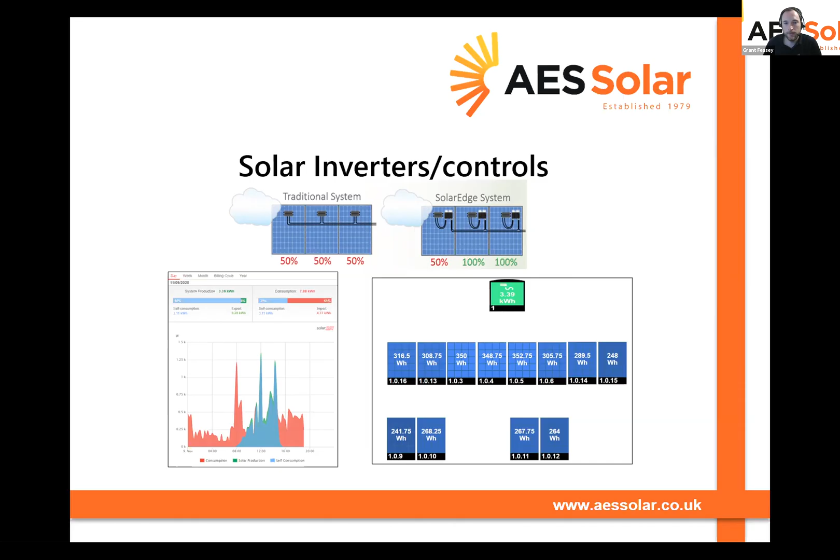So instead of just knowing what the panels are generating, you can see what's being used, what's being exported. There's also sophisticated monitoring, which I'll show on the next slide, which ties in with other devices. As houses get smarter in general, people are getting more aware, they want to see what's going on. So the inverters still do the basic job, they convert the DC from the panels to AC to go to the grid, but they're just doing this in a more intelligent way. They're allowing people to interact with their systems and for the systems in the house to interact with each other in a way that consumers can understand.

So the other products that go alongside solar PV: there's a growing trend for people not just to want to generate their own energy, but to have more and more of these devices that allow them to use it smartly and to be self-sufficient. And you get two types of customers. You get customers who want it to be sustainable and cost effective. You also get customers who see energy products now as a section of gadgets. So people would look at spending money on televisions or nice furniture or cars.

Now they're looking at things like home batteries, where they can see how much energy they're using themselves. They can use that power in a power cut. You can divert energy to your hot water tanks to maximize how much energy you use on site. Electric vehicles are becoming more common, and also things like smart hot water tanks. A company called Mixergy have a nice product that can tie into smart grid trading that could benefit from smart tariffs, where you can automatically use energy in the tank. You can import during low tariff times, and systems can manage all this automatically.

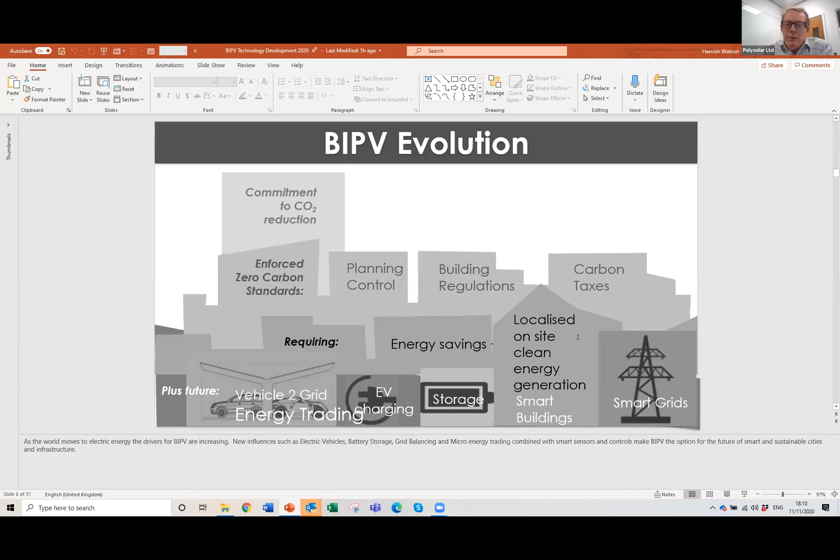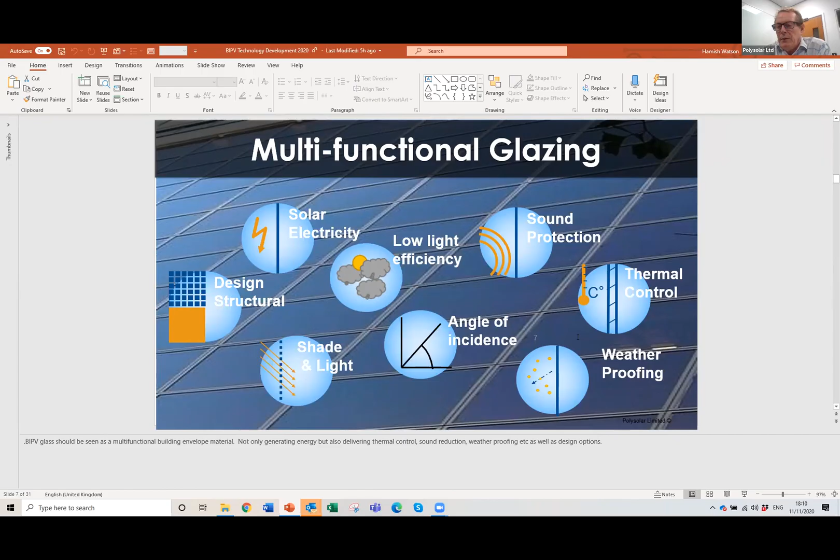Photovoltaic glazing is more than just a piece of glass, and it's more than a solar panel. It actually performs multiple functions and should be used as a multifunctional glazing material. So it's basically a high-end glazing, where it not only has the ability to produce power, but it also can reduce thermal losses, and can be used as an architectural feature. However, everything always comes down to price and return on investment. This is true within building integrated photovoltaics as it is in conventional photovoltaics.

This is an example as a sort of guidance. It certainly doesn't address any particular figures here. But if you're looking at a replacement for a curtain walling system in an office building, the construction costs with BIPV are the same. Your curtain walling framework, which is the aluminium mounting frame for glazing, is basically the same. We make small adaptations to existing systems, and we have our own as well. And then you've got the glass cost.

Now, the glass cost here is the glass for the outer glass, which is the photovoltaic glass, vis-a-vis a conventional piece of glass. But when it's built into a double glazed unit, its proportionate cost becomes fairly small as an additional cost for that PV element. Broadly speaking, to give you a rough idea, a PV glass vis-a-vis a conventional glass is probably about twice as much for the actual glass, but once it's into a high-end unit, it becomes actually quite a small proportion.

On top of that, you've got the electrical element, that's the wiring and the inverters and those sorts of things. They, as a proportion, are relatively small in BIPV, and their costs have dropped quite dramatically as well, alongside the cost of PV itself. In addition, you may do away with things like shading systems, brise-soleils, and those sorts of things on the outside of the building, i.e. mechanical constructions. And therefore the cost may be offset there.

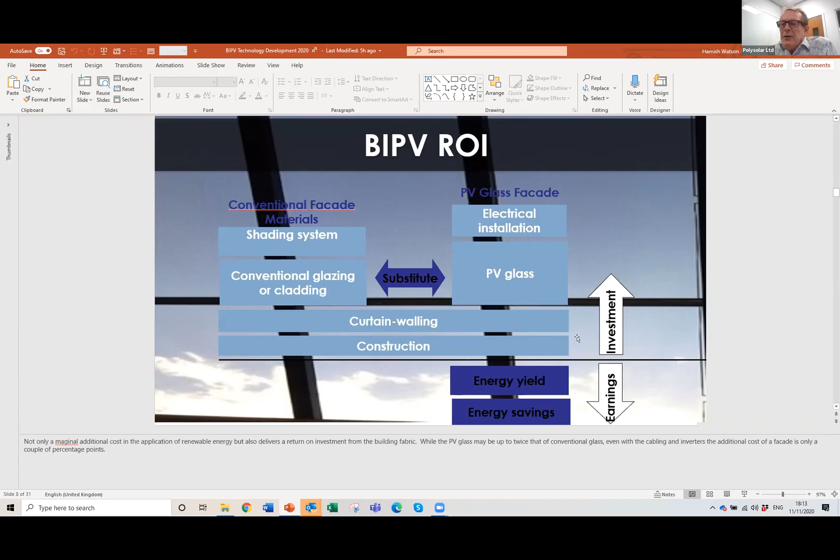And given that architecture is all about trying to put as much glass on an office building as possible, in order to allow it to be a deeper building and let light to the center of the building. The disadvantage of putting glass in a building is your heat losses or heat gains are significant, and therefore all those benefits are being lost in the energy that you've had to use. So there's always that trade-off in construction.

So just to give you a rough idea in terms of the technologies here. One of the advantages of thin film and the transparent glass that we use is it works at high temperatures, with less reduction in efficiency at high temperatures. Its efficiency is also consistent across the light spectrum, the light intensity, and so you don't get that drop off with low light levels.

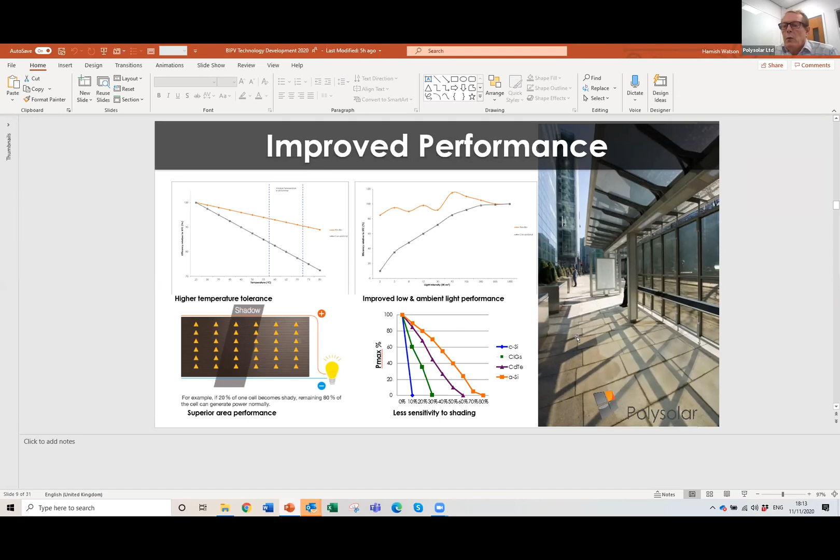Equally, it's less sensitive to shading, and we tend to link in parallel. So you're doing away with the need for microinverters and the like on a system. As I said, the other side of it is the thermal performance side of it.

So you're getting G values, and G value is primarily the heat gain into a building. And that is basically about half what you get out of high-end glazing currently using photovoltaic glazing. The U value is the insulation value, and that in most cases is about the equivalent of a triple glazed unit vis-a-vis a double glazed unit.

So those thermal values can actually produce much more of a benefit or a return to the customer than the power that they're generating in the first place. But it's an interesting factor. The reason behind that is threefold.

One is that the actual cells of the glass are made up of the same materials that you use to reflect heat anyway in conventional glass, but that actually makes the cell of the glass. In addition to that, you've got the shading effect of the photovoltaic, and in addition to that, you've also got some of that infrared light being transferred into electricity rather than into heat.

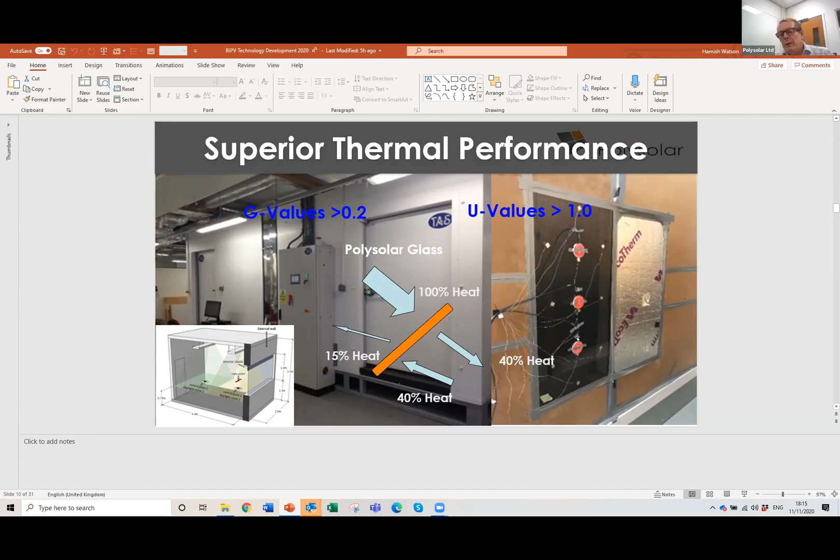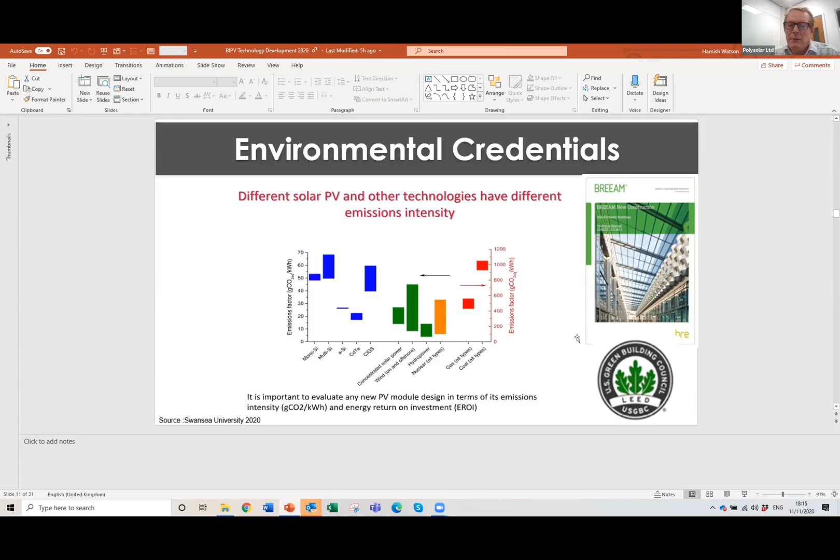In terms of what we produce as a company, we started out life with amorphous silicon. We made that transparent primarily just by putting a transparent conductive layer on the other side of the glass. It's a technology which was developed originally by BP about 20 odd years ago. Low efficiency relative to today's technology, and has largely dropped out of the market. It was much more important a decade ago when crystalline silicon was very expensive.

More recently we developed products in the cadmium telluride sector. This is a slightly different technology in the sense that the active material we put on and then we take off with a laser in order to pattern it to let light through, and therefore we can vary that transparency depending on what you want.

Again, the efficiency is about twice what it is for amorphous silicon, but still about half of what it is for crystalline silicon, where we also produce crystalline silicon semi-transparent cells where you've got crystalline cells embedded in glass and the light is allowed through around that, but it isn't actually a see-through system.

Our next generation of technologies, and where we are one of the world leaders, is in organic photovoltaics, which is man-made materials performing the same function, but the great advantage from a transparency point of view is that we can make them naturally transparent, and we can also save a lot of money in terms of how it's produced, and it's much more effective for the glazing industry rather than just the solar industry. The efficiency levels are rising all the time.

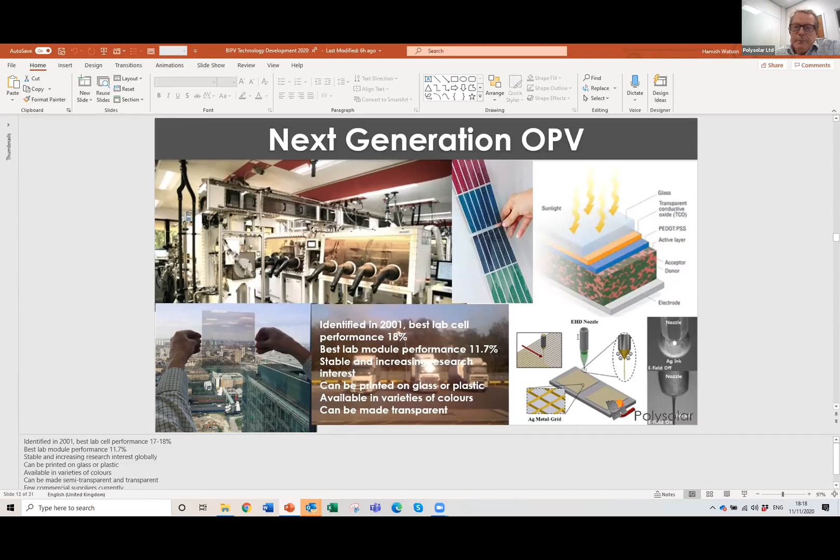Just to let you know a bit about other technologies, you've probably all heard about perovskites. Oxford PV is one of the pioneers in that field. That's a technology which has been very successful in terms of its efficiency improvements, and had a lot of global interest in terms of research and development.

It has a few problems still, in terms of its lifetime expectancy, but also the fact that it has a lot of lead in its manufacture. And so it still has constraining factors. More recently, Oxford PV started putting their perovskites on top of crystalline silicon to increase the overall efficiency of conventional solar panels.

In addition to that, there are some other technologies, and I won't go into all of them, but there's concentrators, luminescent films, diverting the light to concentrated PV cells on the side of windows to make them transparent, and a number of areas around that, none of which we directly operate in, but you should be aware of them.

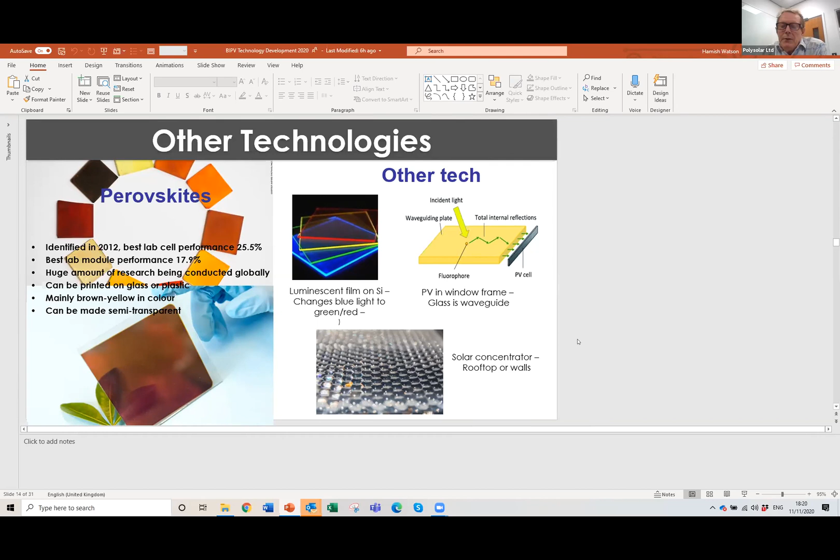In terms of the manufacturing side, the great advantage of organics is that it's a liquid print process. So we can print the active materials directly onto the glass, and we can do that with spray coaters and actually just spray those materials on in order to build up your cell. That has advantages from the glazing point of view, because it means we can make modules of different sizes, shapes, really anything that you can do with glass today, we can do with PV glass.

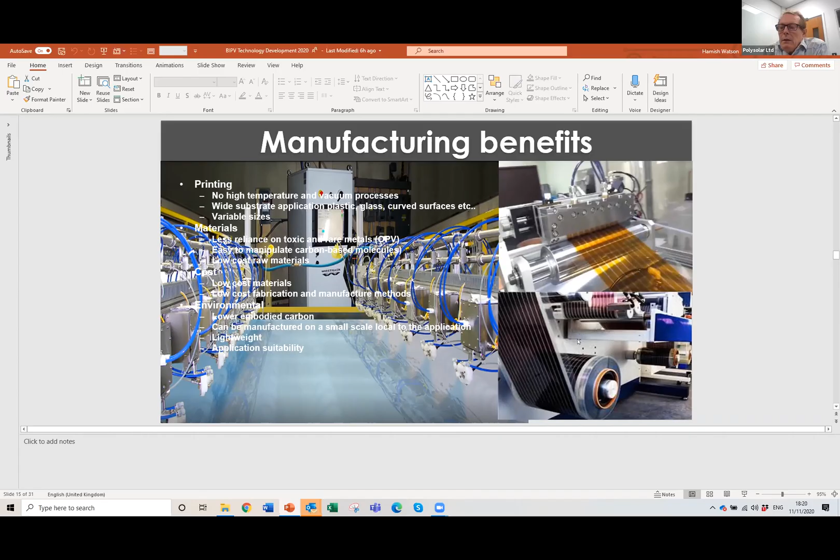Equally, the cost is relatively low, the material cost is low, and the production cost is relatively low. And also it is environmentally more friendly than the existing processes for the manufacture of crystalline silicon modules. Other areas that we're involved in, in terms of developments as well, is in prefabrication and other alternative coatings to make them more aesthetically pleasing.

So today you can buy coatings for PV cells which are white. So you can have white solar panels. Yes, they're not quite as efficient as the original solar panel, but the fact that they work at all with a white coating in itself is quite clever.

Equally, one of the constraints of building with photovoltaic glazing has been the need for different trades, different skills within the construction sector that haven't really existed. And therefore, we're trying to move as far as possible into a prefabricated modularized type system where all the wiring is already in place and you're just putting the sections of those buildings together.

I should also talk a bit about building applied PV. Now we classify BIPV as being part of the core envelope of a building. BAPV, or building applied photovoltaics, is when you're attaching the photovoltaic material to another existing structure. So there's particularly the flexible PV area, you're sticking it onto roofs, and increasingly with OPV some of our competitors are putting their plastic films onto other structures.

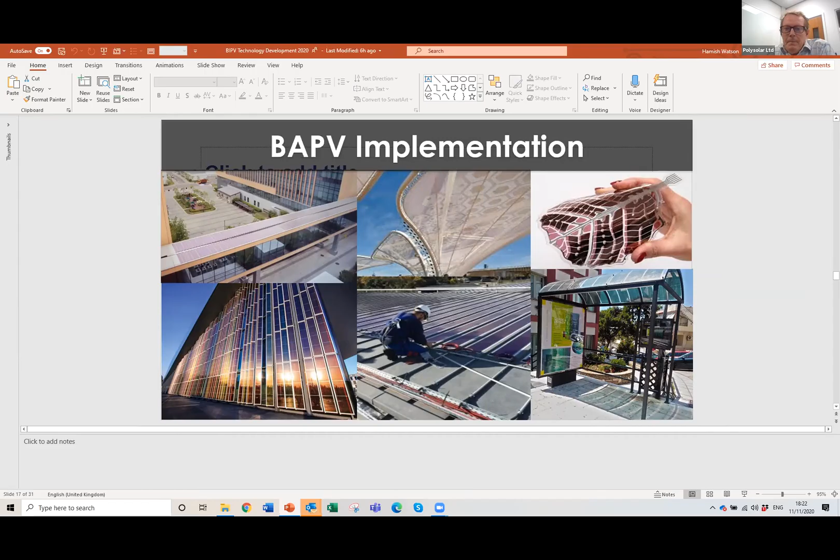So, given the time, I'll try and quickly run through some of it, just so you've got certain examples of some of our installations and projects, and hence where the applications for BIPV are.

This is a project for Gloucestershire County Council. These were 1960s office buildings, quite a substantial array of office buildings, where we stripped down the original cladding and replaced it with photovoltaics. So these are the brownie colored panels on here, as well as some of the window glazing panels. And they're put in as double glazed units, and we've also got conventional PV on the roof on this particular project.

Again, rain screen cladding. So rain screen cladding is really, rather than framing it, you just bond it to a framework behind it. This is actually the largest building in Gibraltar, and this is cladding over a concrete car park element of the building, to be honest.

Skylights, this is a project in Donington, but the advantage is you're letting natural light through into the space below while still producing power and still having an attractive roofing system.

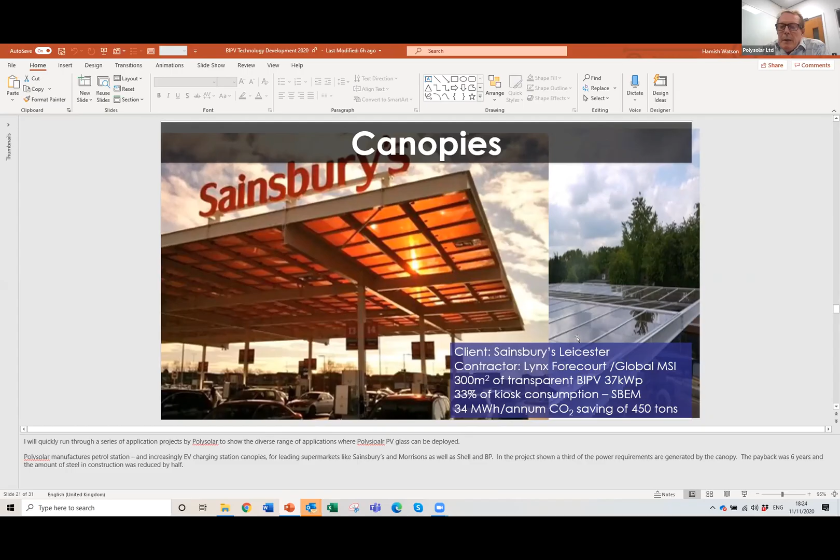Canopies, one of our largest areas of activity. We've done a number of petrol stations for Sainsbury's, whereby rather than having your conventional dual layer of two sheets of metal, you do away with that. The actual structure therefore becomes cheaper than the conventional structure. In Sainsbury's case, the glass is naturally orange, so it suits their branding, but it also produces a reasonable amount of power to help power their pumps and kiosks and everything else.

Shelters, street furniture type of structures, whereby you're making a feature out of existing structures that you want anyway, and therefore you're getting a double advantage.

Bus shelters, this one's at Canary Wharf, just outside HSBC's headquarters in Canary Wharf in London. This powers the lighting, the advertising boarding and the like, but also any excess is fed into the shopping centre below here. The inverters are hidden within the framework of the structure, and this is doing the role of a bus shelter.

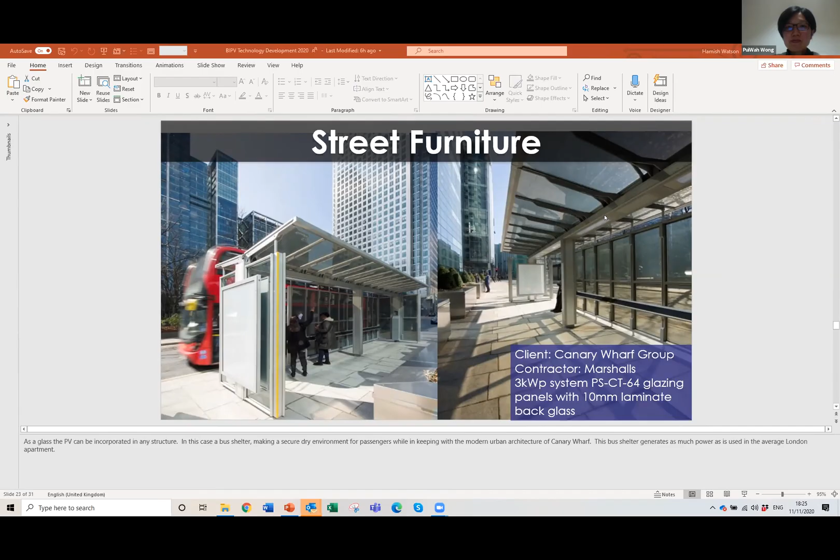Another important area for us is heritage projects, and Grant mentioned the castle. So one of the problems with heritage buildings is that they're all keen to be as low carbon as possible, but it's very difficult to put any conventional solar panels on a building of historic importance. But with glazing, they can do that without any real major impact.

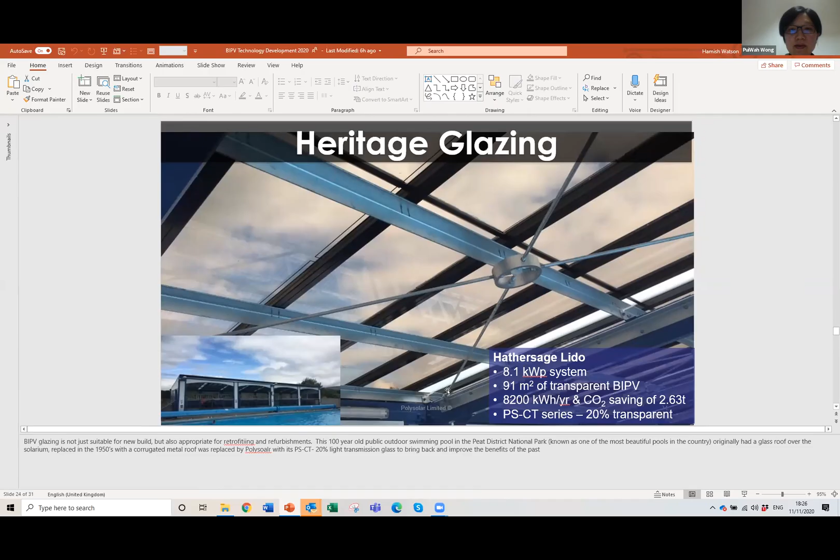This is an outdoor swimming pool in the Peak District, supposedly the world's prettiest Lido, but whether that's true or not is debatable. But this was a project where in the Victorian times it had a glass roof, which was then replaced with a corrugated iron roof, and now has a glass roof again.

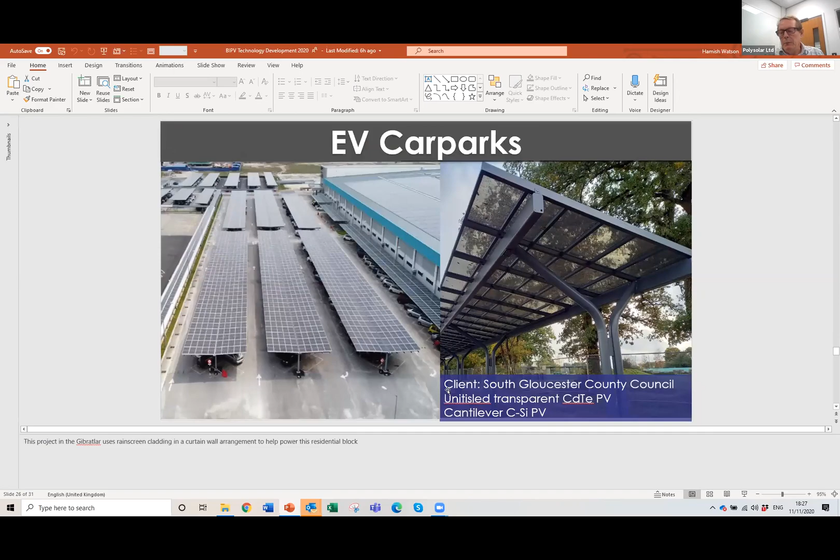Yeah, sorry. Infrastructure projects, electric vehicle charging points, increasingly important from our point of view, and there's a lot of energy going into the electric vehicle charging area, as well as sort of smart homes where you're improving the general ability to sell a property as much as you are actually generating power.

So it looks as though my computer's given up on me anyway. So a good place to start. Okay.

We put our glass in greenhouses. We actually get improvements in growth of plants. We can double the protein content of plants, and strange sort of elements like that. So one last one: automotive glazing. We've got the world's first, well, we believe it's the first integrated transparent PV sunroof. We're working on that area as well.

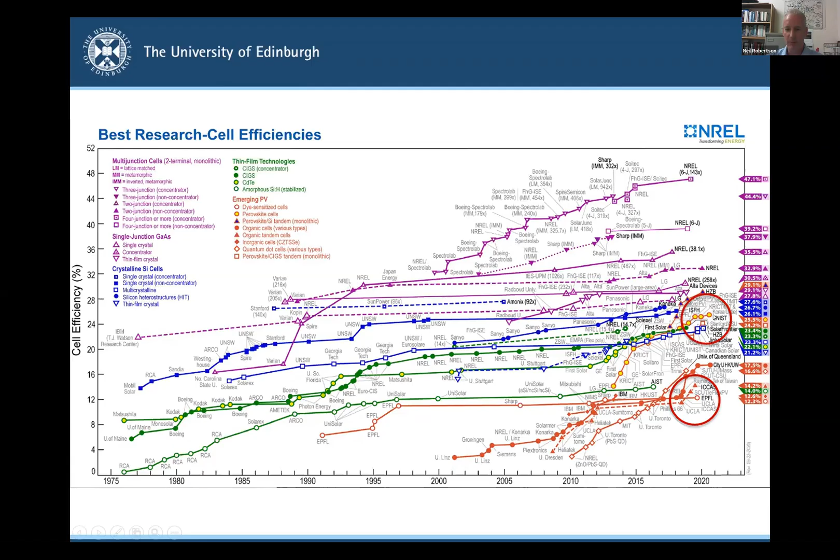For those of you who are unfamiliar, so if you're working, for example, in architecture or something of that nature, you might be unfamiliar with the actual inner workings of solar cells. So I just have this very quick schematic to illustrate what's going on, because it does pertain to some of the things I'll say later. You need an absorber layer which absorbs the light and uses that energy to excite an electron. So the technologies are named after this absorber layer. So crystalline silicon, perovskite, cadmium telluride, these are all the names of the absorber layer.

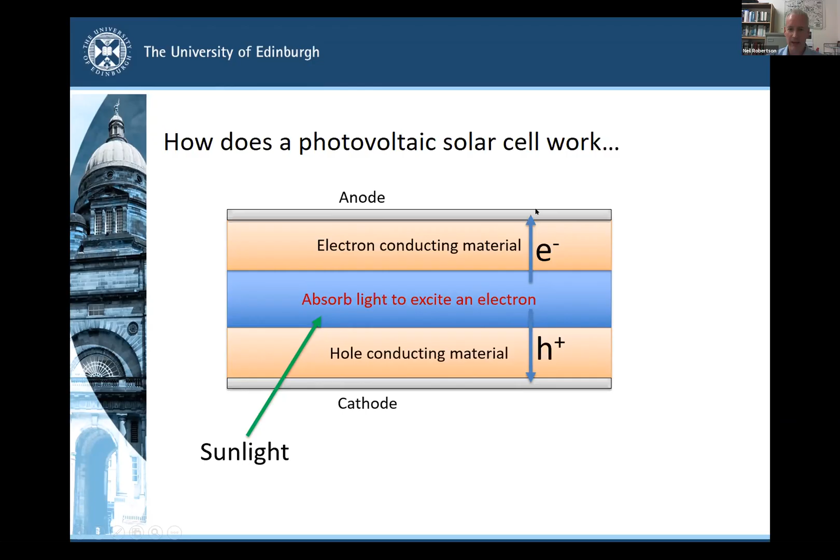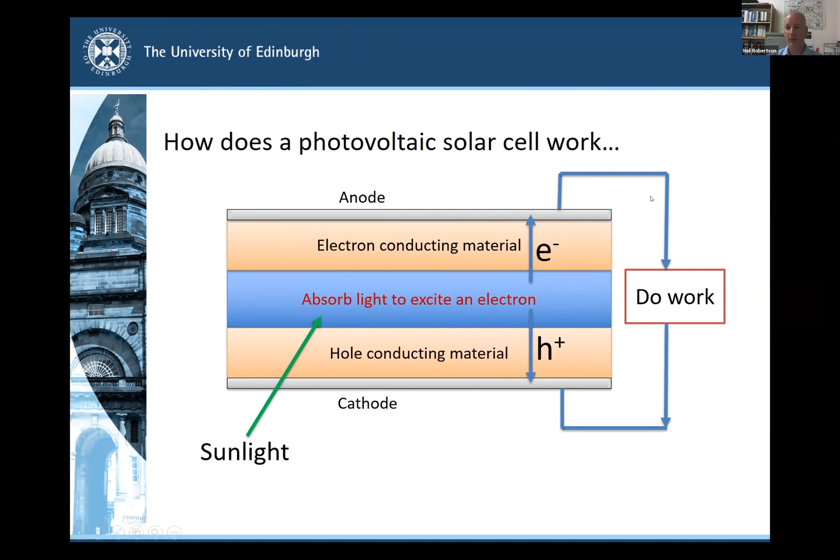You then need a mechanism to ensure that the electrons which are excited and can now move around will move in one direction to the anode, and the holes, which are the positive charges left behind when the negative electrons are removed, that the holes can go in another direction and collect at the cathode. So all solar cells really share this common mechanism, absorbing the light and then using that energy to move electrons in one direction and holes in the other direction. That builds up a potential difference, a photovoltage, and that can then be used to drive a current and do some work in an external circuit, with the electrons going around the external circuit. So that's how all of these things work.

So I'm going to start off with a few words on dye-sensitized solar cells. So there have been a few companies over the years, some of which have come and gone, which have attempted to commercialize dye-sensitized solar cells. So these particular solar cells really mimic the mechanism of photosynthesis, using dye molecules as the light absorbing layer. One of the latest companies to push this forward are Exeger, based in Sweden, and they're really pushing the eco-friendly green credentials of the technology and the links to photosynthesis.

And the markets they're aiming at are essentially indoor applications and consumer electronics. So not attempting to achieve mass power generation, but power for your laptop, power for your phone, and indoor power to power the numerous sensors and devices that we're starting to see in smart buildings, which I'll say more about shortly.

There are applications for dye-sensitized solar cells outdoors, although these are really still at the demonstrator project level. So this science tower in Graz in Austria has the largest installation of dye-sensitized solar cells in the world from 2019. But as I say, it's still a demonstrator type project rather than something that's really commercially standalone on its own. And personally, I would say that this is less likely to be a major technology direction. The more likely direction are the indoor applications and consumer goods applications.

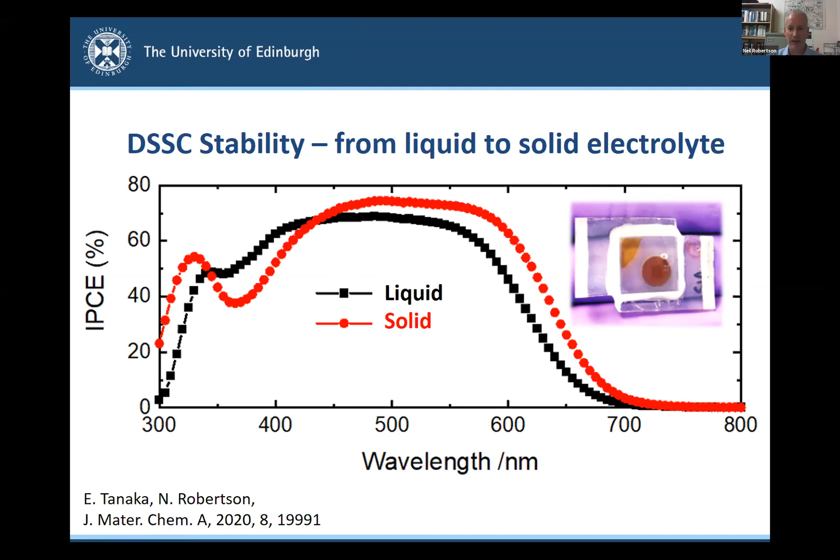So that was a quick highlight of the potential of dye-sensitized solar cells in indoor applications. And the rest of the time, we're going to talk about what's happening in the world of perovskite solar cells, following on from some of the things that Hamish was saying. First of all, what is a perovskite? Well, a perovskite actually is a name for a huge family of materials that share a common crystal structure, a common arrangement of the atoms in the solid structure. And the ones that are relevant to solar cell applications are these lead halide perovskites. So they have lead and iodide as part of the formula.

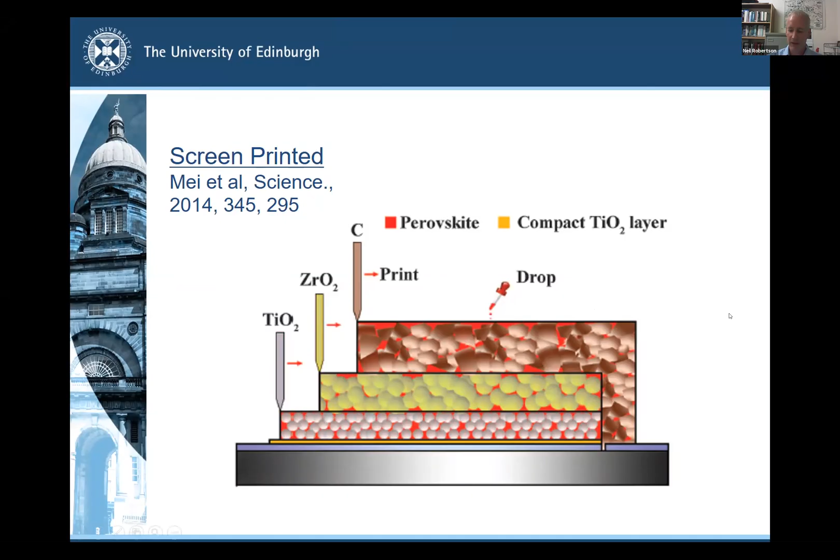So it's a clean room, but it doesn't have to be ultra clean. And there are no high energy or high temperature, ultra high vacuum or anything like that involved. It's all just screen printing. So they are working on commercialization.

Another company that is leading in commercialization is Saule Technologies. One of my former students also works here, and they are focusing on inkjet printing. So they point out that inkjet printing can be very flexible. You can change the requirements for different customers very quickly. And again, they're focused on things like foils on roofs, because the cells are low weight. They can be semi-transparent, as Hamish was outlining for other technologies.

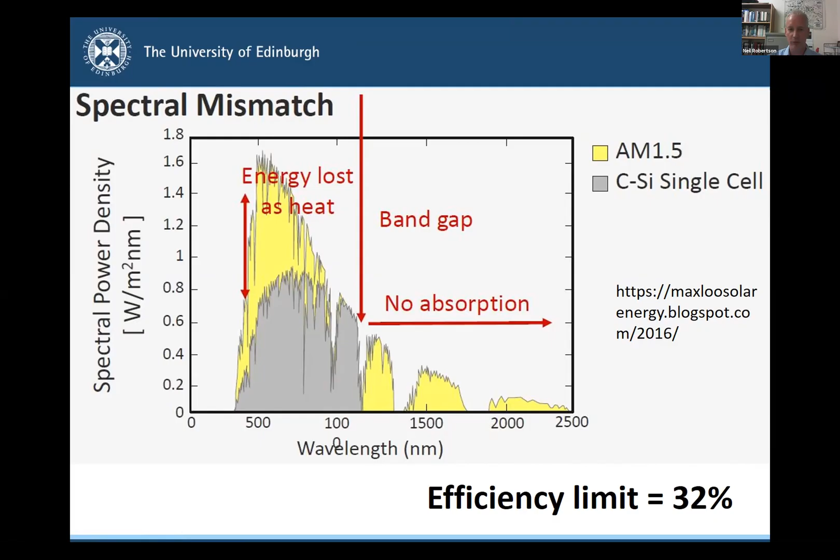So that's me done. Here's my conclusions. Are these disruptive technologies? Dye-sensitized solar cells have the potential to be that, but specifically for indoor use, not to compete with silicon, not for properties or outdoor or mass power generation. In this particular niche, it could be huge, and they're one of the best technologies for that context.

Perovskite solar cells, we are promised products imminently from Oxford PV amongst others, and they are promising that those technologies will be more efficient than silicon because they'll be tandems. And that then can be a step change, disruptive introduction to the market. It may take time, there may be challenges still, but it's on its way. The real question for me is around stability. If the efficiency is over 30%, so much higher than silicon, that's fabulous, but it falls down flat if it only lasts 10 or 15 years.

It has to have a comparable lifetime to silicon products. So let's see if they can manage that. We'll find out in the near future.